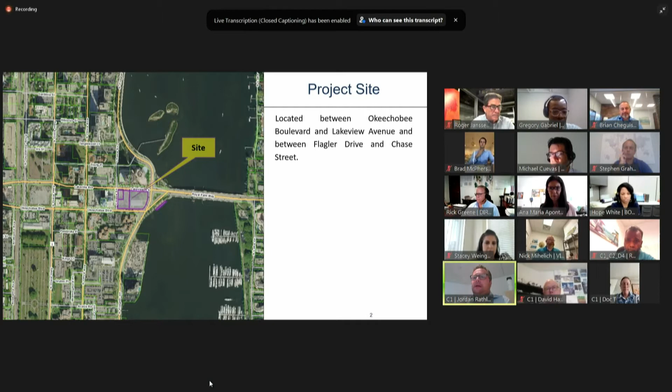Thank you, good, great. Staff and board, appreciate your time this morning. We're here, Jordan Rathlev on behalf of the applicant, Related Urban Development, to present DAC special plan review case number 1908A. I think many of you on the board are familiar from the initial approval of this project. For those who are not, the site is between Lakeview and Okeechobee, bordered by Chase and Flagler, right at the Middle Bridge in downtown West Palm Beach. In regards to the request today, we have a handful of requests that we view as minor modifications to the initial site plan that was approved just over 2 years ago.

I'm going to run through quickly what those requests are and then highlight them on the plans on the following couple of pages. So what we have requested today before the board is to remove the vehicular plaza and the primary valet operations located just east of the tower and relocate them slightly to the west under a covered area. We've shifted the main building entrance and lobby from the east side of the tower to the north side facing Lakeview. We've also shifted the curb cuts that were initially approved on Lakeview by FDOT and staff to the west. We've also revised the flow of traffic at the request of FDOT and staff for that primary drop-off at the building. FDOT has pre-approved that shift already. We've also shifted the retail location to a more prominent frontage on Lakeview to create a more active use along the Lakeview frontage. And we've also redesigned the large public space that sits to the east of the building and north of the existing church, which will remain in place, that will be designated as part of the final process here.

If you can recall, in December 2019 we had a full approval by this board. The conditions of approval that were in place will remain, with some revisions recommended by staff, and we are in agreement with staff on all the conditions of approval attached to this application.

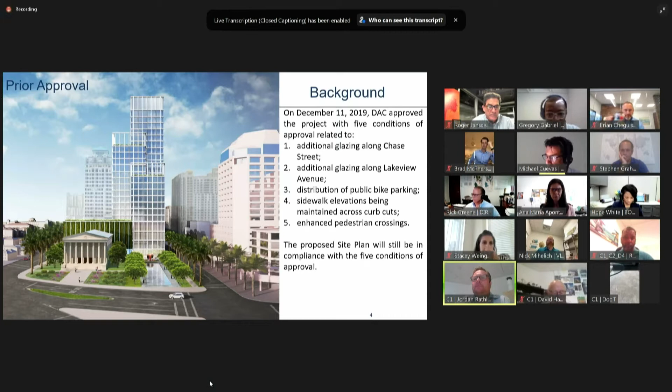On the left-hand side of the slide here is the original approved plan. As you can see, there was a drop-off area to the east of the building. The main building entrance was on the far northeast corner. This was a large drop-off area primarily for valet and Uber or Lyft, and there was a large reflecting pool and public space to the east.

What we have done over the last year and a half is look at enhancing that drop-off to the west in order to make it fully covered underneath the building footprint. This would only now be for Uber or Lyft drop-off. Valet is actually handled on the second floor of the garage.

To the east of the main building entrance, the redesign of the public open space has created a much more dynamic and flexible space. The water feature is reduced some, but it actually creates more green space and open space that can be utilized by building tenants, church members, as well as the city as a whole. We think this is much more flexible and open space, and staff agrees that it offers a much more enhanced amenity for the downtown as a whole.

So again, the primary changes are shifting that primary drop-off area west to the building footprint, and enhancing and enlarging the public open space. The total square footage of the building, the height, everything from the second floor up remains relatively unchanged. We'll show some elevations where there are slight modifications, but the majority of change is taking place solely at the ground level, given the revisions to the drop-off area.

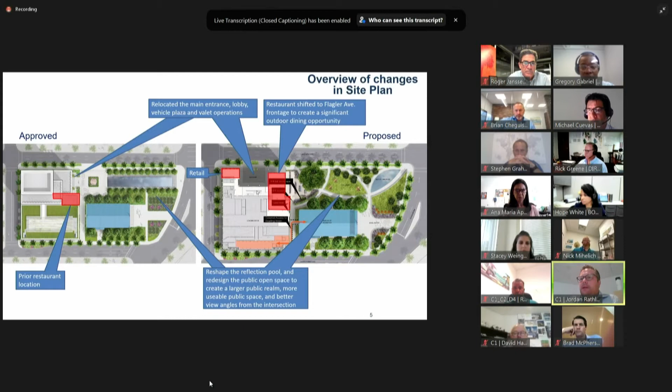In terms of traffic flow, the original plan had this drop-off to the east of the building. Valet, if you were dropping your car off, would run in a small alley between the church and the building directly into the parking garage. If you were a visitor or tenant parking, you would go down Chase into the parking garage. In the revised plan, the entrance into the parking garage has shifted slightly but relatively remains unchanged.

The primary difference is that drop-off is now shifted a little further west on Lakeview and directly under the building. In the prior plan, when entering the drop-off area, you would come past on Lakeview to the west, enter, and then exit on the eastern portion of the drop-off. In conversations with staff and FDOT, that is now shifted, so you'll actually come in to the first curb cut and then exit on the further western portion.

We think this enhances the traffic flow, but the original plan was based on FDOT comments. They've changed their mind, and staff and ourselves are in agreement on that change of traffic flow. You'll also notice this area, where the valet was primarily running cars before, is now purely pedestrian, so we think that's an enhanced improvement to the site plan as well.

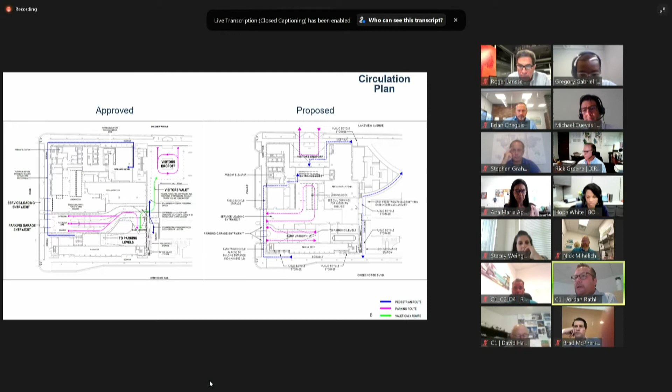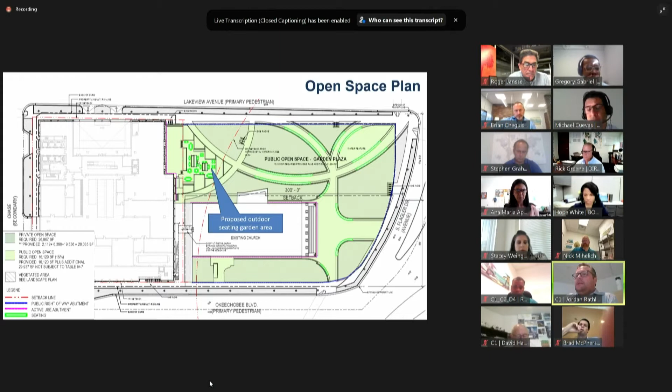In terms of what that does for the view corridors, from the building looking east you have a great public open space. One thing to note: the existing tree that remains on site today will stay as part of the revised plan. The original plan had that tree being removed, but we've redesigned to incorporate it into the landscape plan. So not only is it a much more lush environment, you're able to retain the existing large tree in the middle of the property.

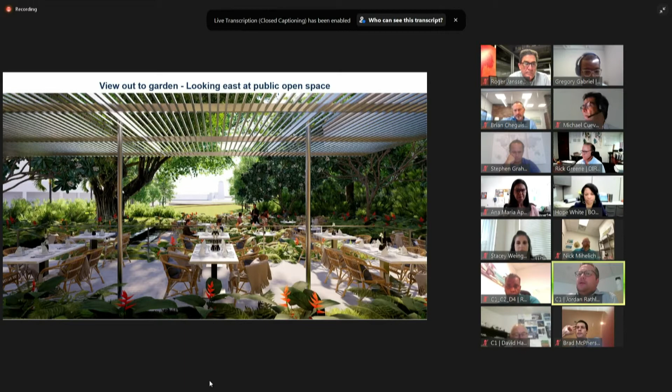Just another revised view of that active frontage on the eastern portion of the building. Again, this was initially the building entrance, but this provides a much more active use fronting that public open space.

A view of just the revised landscape area in front of the church continues to have its prominence, which is very important to staff and the historic preservation component of this project. This continues to showcase the church at the front of the property in a very lush landscaped environment.

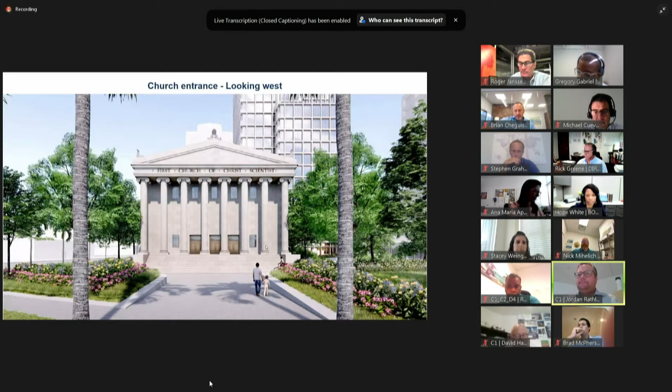In terms of the elevation, this is the north elevation where that drop-off area has shifted, becoming a very dramatic double height, fully covered drop-off experience for Uber and Lyft.

We've also added a retail component to the northeast corner of the building. Before this was just an elevator lobby, and the elevation of the glass came to grade with a living wall component, but this actually activates it much more with the retail presence on that northeast corner.

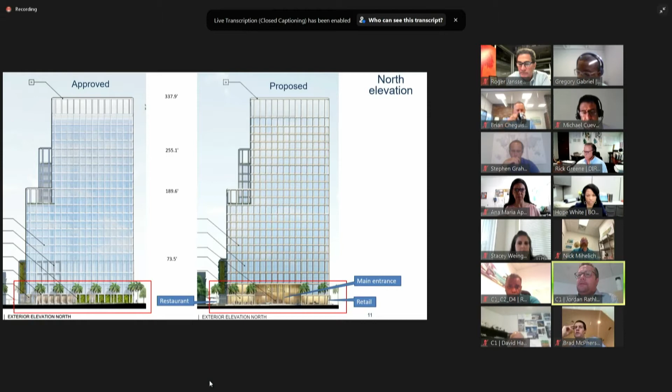As you can see, everything up in the tower remains unchanged. On the south elevation, really remains unchanged. We've played with some of the coloring of the glass, but really the living wall and everything above that shields the garage, and then the balance of the tower remains unchanged on the south elevation.

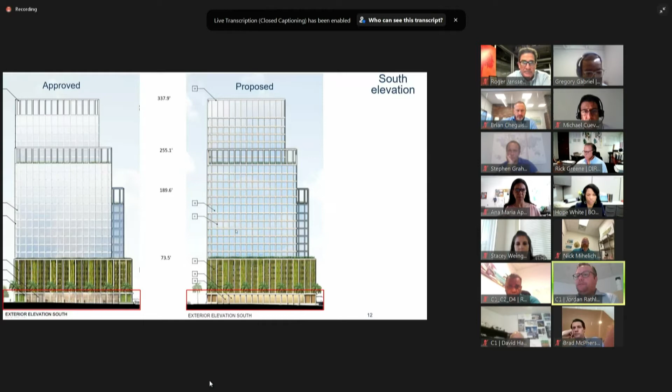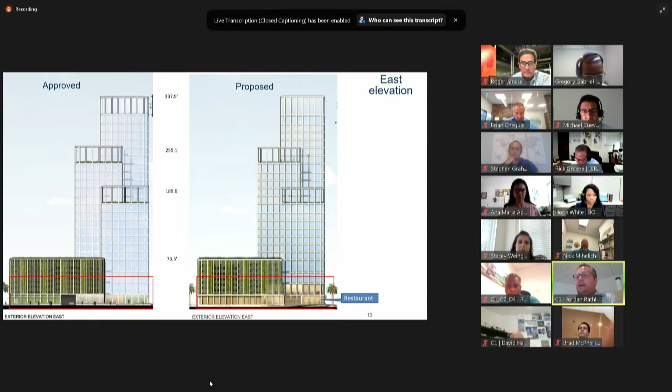On the east elevation, again, you see the restaurant has actually added some square footage on the second floor as well. So we've added some more active use on that eastern second floor, where before it was all garage, but everything again above that elevation to the top of the building remains unchanged, as well as the total height.

And then from the west facade, very similar in terms of the loading dock entrance shifting slightly to the south, but the balance of the facade remains unchanged from the original approval in December of 2019.

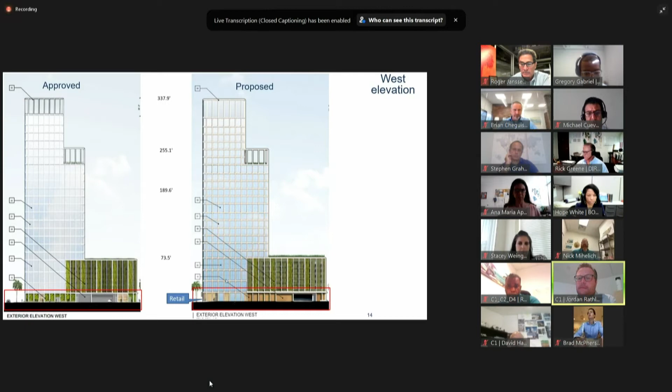So I will stop there for any questions, but I think highlighting the primary differences from the approval in December of '19, it remains the slight shift of the entrance to the west to be a fully covered experience, and the larger enhanced public open space to the east that is a great public amenity now, given it's a much more flexible and functional space. It had previously been designed with a very beautiful reflecting pool, but functionally was not a great use of the space in terms of activity and ability to program it into the future.

Okay, thank you, Jordan. So nice, concise comparison of previous and proposed. Thank you. Would staff like to comment now?

Yeah, Mr. Chair, staff has a presentation. If you're open to that, Jordan, thank you. Oh, no. Let me share my screen and do a brief presentation.

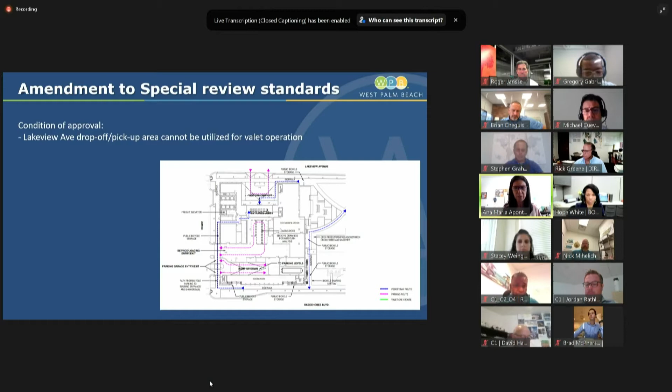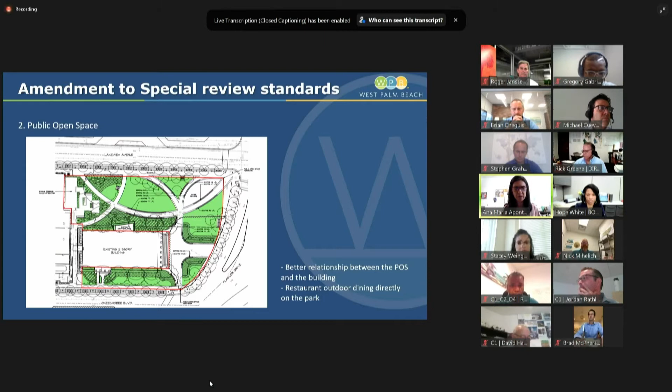Regarding the public open space, staff believes the new design creates a better relationship between the public open space and the building. It's enhanced quality instead of having the drop-off area separating the building from the public open space. Now we have a direct relationship between the restaurant and its outdoor seating with the park, which is an asset for the project and the community, activating the public open space directly.

Regarding the open space, we have some conditions of approval recommended. First is regarding the tree canopy. Staff is recommending the tree canopy calculation required for the public open space be revised to fully comply with current requirements. The existing tree canopy may be counted as long as it's within the design of the public open space, and we believe this can be handled as a staff level review after board approval.

Staff is also recommending additional shade trees along the interior pedestrian path to create a comfortable environment for pedestrians. This refers to the path that goes to the center of the open space. There are some shade trees along the church, but other areas are totally exposed. We think it's important to provide shade along that path so pedestrians can comfortably stroll through the park without affecting the open area in the center, maintaining the integrity of the open space while providing additional comfort.

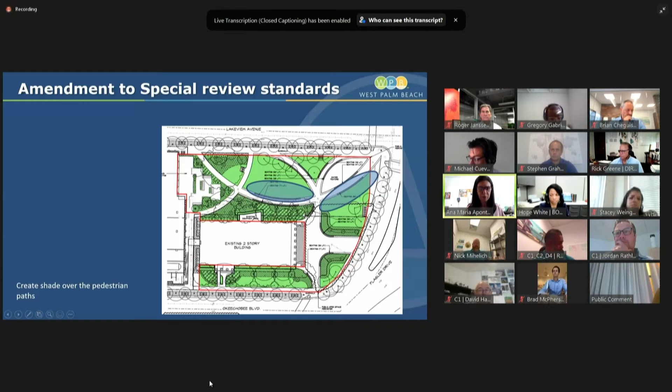Staff is also recommending that for seating, at least 15% incorporate a backrest. At this point they're proposed as seating walls along the park, which we think are appropriate, but we recommend that at least 15% of the seating has some type of backrest to accommodate older residents.

We are also recommending that the restaurant patio area provide direct access to the public open space. This is a request to really engage the restaurant into the public open space. We see restaurant patrons finishing their dinner and walking directly into the space to enjoy it. This is an additional request not incorporated in the previous approval because the design was different.

The new design has the main entrance directly on Lakeview, creating a prominent entrance in the building directly on the street, on Lakeview Avenue. The restaurant now fully addresses Lakeview Avenue and is fully incorporated into the public open space, which is a major asset to the public open space, as I mentioned.

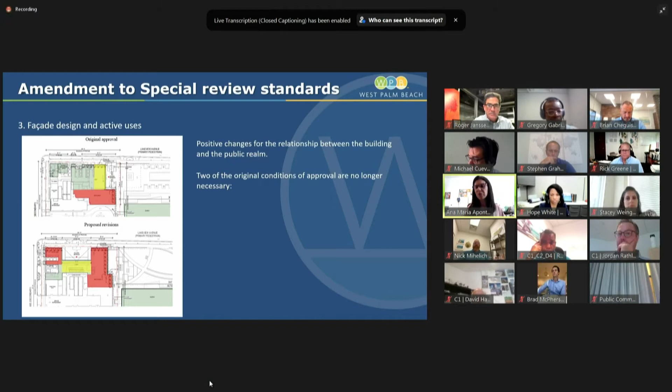With these proposed changes, two of the original conditions of approval are no longer necessary. The original approval included two conditions requiring additional glazing at the corner of Chase Street and Lakeview Avenue, and also at the manager office that was previously located along Lakeview Avenue.

With the new design, the whole area where additional glazing was originally requested is now fully glazed and is going to have the retail space. So these two conditions are no longer necessary, and staff is recommending their removal.

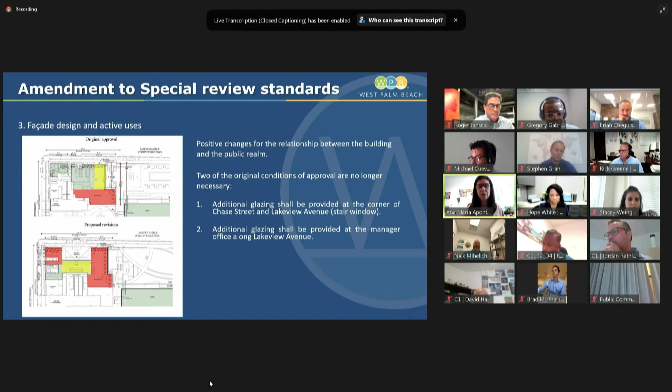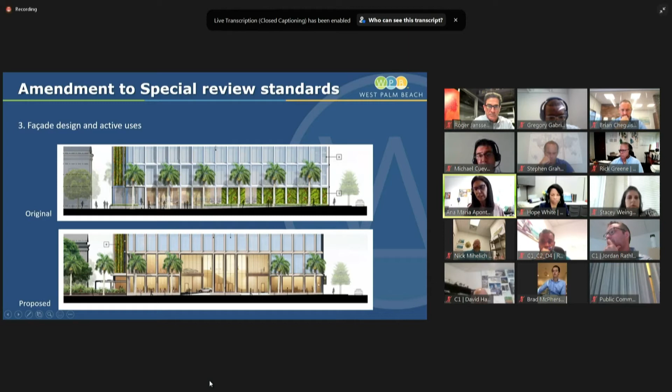This is a picture of the facade. You can see on top, the original had the living walls, for which we had some conditions of approval requiring additional glazing. Now the new proposal is fully glass and storefront, so those conditions are no longer necessary.

In summary, staff believes the project complies with the special review standards as in the original approval, and the changes do not affect this compliance. It's a good project that will have a high impact in the area and will benefit the relationship between the public realm and private space. Staff recommends approval of the proposed amendments based on the finding that the petition meets all the standards as indicated in Section 94-54D.

Staff recommended that the conditions for approval included in the December 11, 2019 final order be amended, removing conditions 1 and 2 and maintaining 3, 4, and 5, which are still applicable. Staff is also recommending additional conditions of approval.

Number 6, the Lakeview Avenue drop-off pickup area shall not be used for valet operations. Number 7, the tree canopy calculation required for the public open space shall be revised to fully comply with current requirements. If the applicant desires to include a larger open space to comply with the public open space requirement, the whole space shall comply with the tree canopy and vegetated area requirements.

An existing tree's canopy can be counted as part of the requirement as long as the canopy is within the designated public open space. Number 8, we are recommending additional shade trees be provided along the interior pedestrian path to create a comfortable environment for pedestrians. Number 9, at least 15% of the seating within the public open space shall incorporate a backrest. Number 10, the restaurant patio area shall provide direct pedestrian access to the public open space.

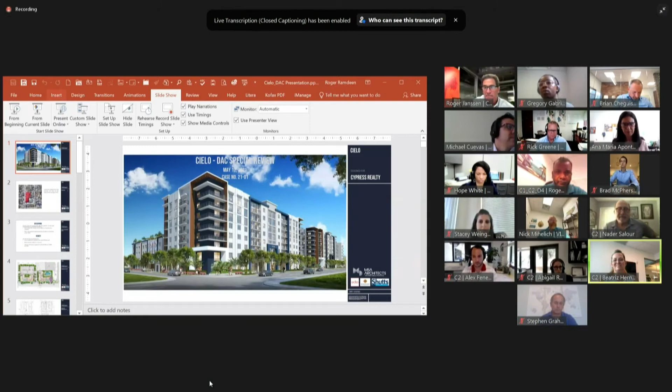Now I still can share the version that we have. Just share the version that you have, it's not that much different. Go ahead, just share it. I would suggest either doing that, and you can note any changes, or we could table this and do the next project and come back later. No, it's fine, I'll just share it. Do you see my screen? Yeah, yes, yep, please proceed. Easy, thank you, look how easy that is. Jesus Christ, okay, I won't start over, but hi again.

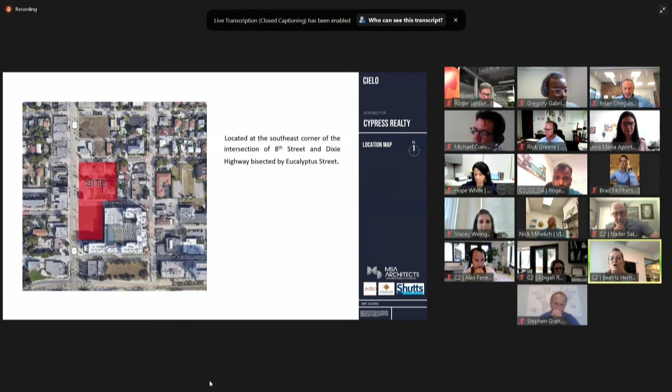So let me just recap a little bit about the history of the project. If you go to the next slide, Roger. This is the location of the site, which is essentially on Dixie between 8th and essentially 6th, and the second basically phase of the Lofton project that we came before you about 7 years ago. So next slide.

In 2014, we had gotten basically a multi-building project approved where phase 1 was completed with 259 units and about 4,000 square feet of retail. And phase 2, which is what is before you here today, with 204 units and about also 4,000 square feet of retail, which never got built. The project has subsequently been sold, still remains Lofton Place, but we're here before you today to amend the site plan to modify phase 2 to allow for additional residential units, approximately 60 units for a total of 264 units. Reduce the retail slightly from 4,000 to 3,400, and the approval of TDRs, which will be before you in June, DAC hearing, of about 28,000 square feet.

The reason for the increase in the density, obviously, as I'm sure you all know, from a development point of view, 200 units is a little small to build a project. So we needed to increase the density for the economy of scale to the 264 units that we're presenting before you here today. So the next slide, please.

This is the site plan that we are proposing. Not much different than what we had originally gotten approved from a footprint perspective. Some of the internal components has changed slightly. Originally there was a pedestrian bridge, which was previously approved in the initial phase. That has not changed. We've relocated some of the public open space components, and you can see here the project sort of in context with the Lofton Place apartments. This project stands on its own as it relates to open space calculations, parking, the setbacks, FAR, and so forth. So this project will be reviewed on its own, not with the phase 1 project.

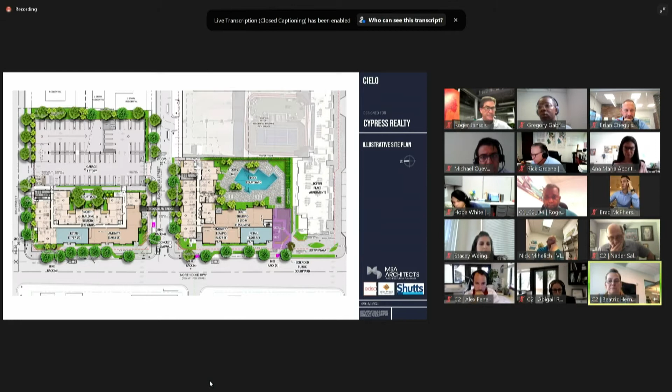So this is essentially the ground floor site plan for our project. Next slide. This just highlights what we got approved back in 2014 and where we are now. You can see it's very similar—there are slight subtle nuances based on the new style of architecture we've created, but very subtle changes in the footprint, not much of a huge alteration.

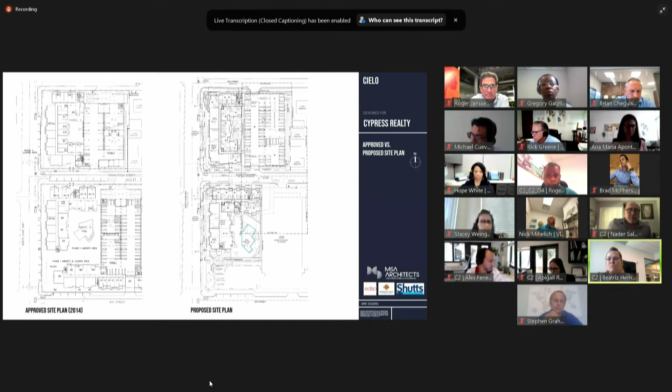Next slide. This identifies a bit, and I think it's mentioned in Ana Maria's staff report, regarding that courtyard I just discussed. There's some discussion about moving the transformer pads that we have shown sort of up against the retail and our building on the south end. We're working with staff to potentially show the alternative relocation of the transformers tucked toward the back between the courtyard, our pool, and the public space, to be able to screen that and use the retail breakout of that open space a little bit better. We're working with FP&L and staff to enhance that public open space.

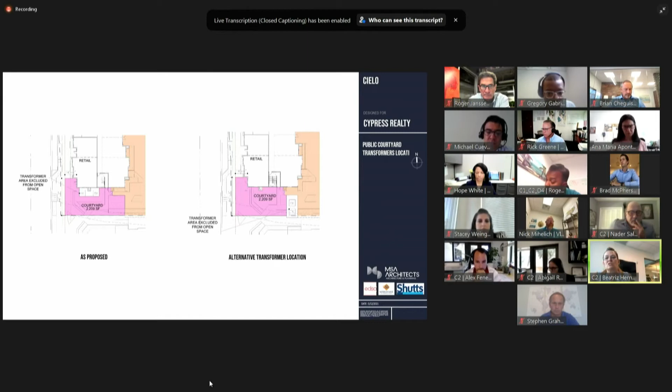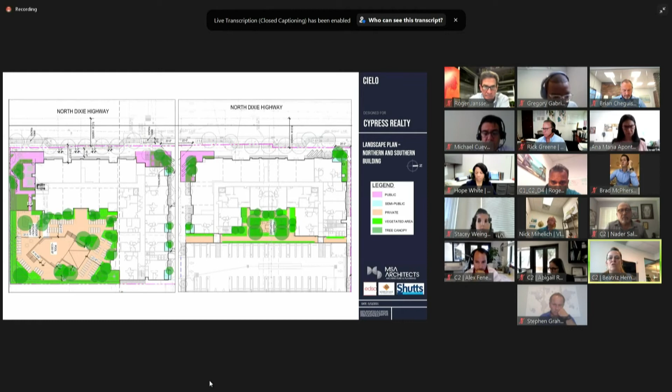So this is just a diagram showing you what a proposed location may look like. Next slide—this shows the additional public open spaces we're providing along North Dixie, and our private and semi-public spaces. The pink shows the public open space, the green spaces show the semi and private open space we're providing. And these are just exhibits showing the tree canopy and vegetated areas we have to satisfy those requirements.

Next slide. In addition to the ground floor open space we're providing, we're also providing screening of the rooftop garage, which we're doing through a combination of trellis screening as well as an amenity area similar to what we did at phase 1. In this case, we have a recreational deck and some outdoor fitness, whether it's pickleball or tennis—I think it's pickleball.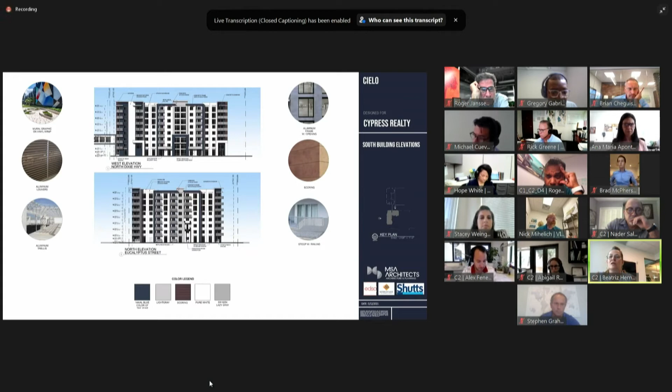Again, continuing on the elevation and the vernacular we're doing—it's a series of contemporary frames that break up the scale of the building. The roof line varies in height; we're going to do a bit more of that based on staff's recommendations to vary the roof line further. There's a series of floor-to-ceiling glass at the tops of our buildings, or at feature locations for entries and lobbies, and then the ground floor frames that create the stoop concept, for a more pedestrian scale.

And again, the south elevation and the east elevation of the south building, very similar to the north, just slightly different. We're bringing in some different color patterns, kind of a navy blue with a light gray, and then a wood look with scoring to bring a little bit more texture onto the building.

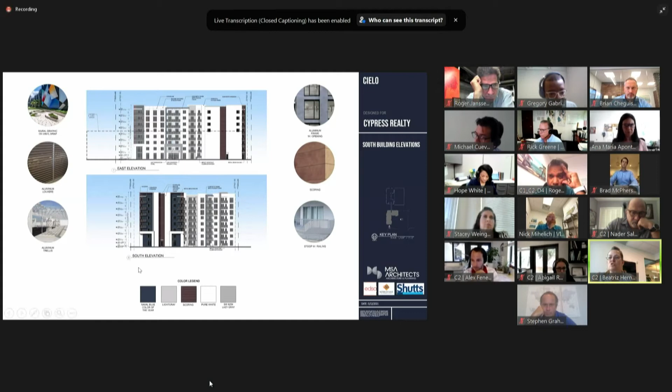These are our street elevations, which show the building in context with scale and massing for the project. Similar here, showing it from the south building, showing the parking garage and our 8-story building, and how it transitions down to the 2-story residential.

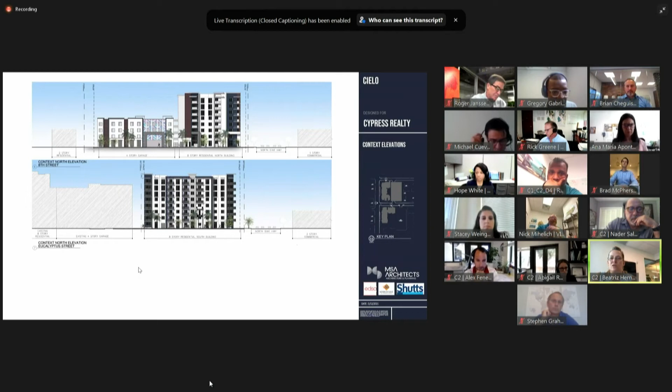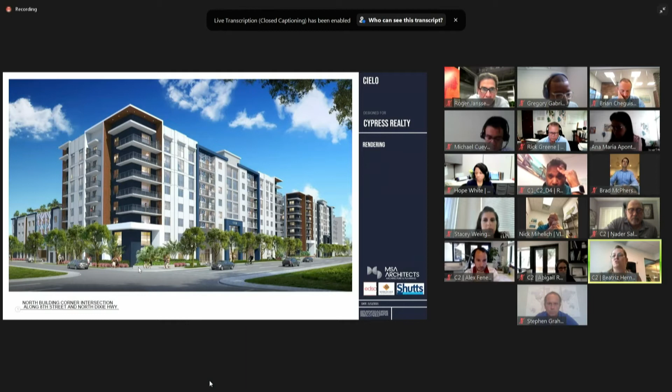And these are our renderings that really depict what you just saw in the 2D elevations. We think this is a very dramatic, elegant, modern, contemporary building. You can see how the vinyl wraps are going to be sort of a pop or an accent on the building. The design is still in flux in terms of the final look, but we like the pattern and direction it's taking.

You can see the parking garage in the background on the left side of your rendering, and sort of the street level uses that are happening along Dixie.

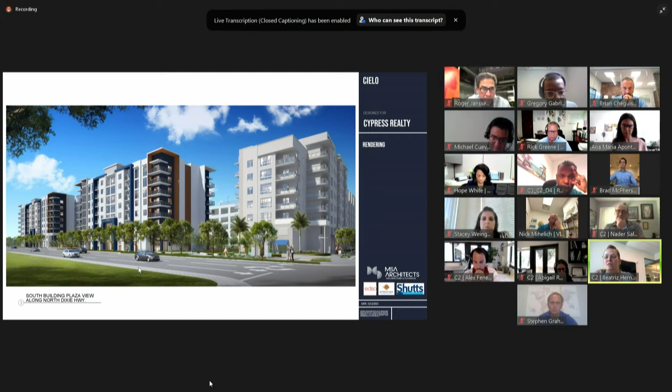These are just more enlargements of the street level perspectives of the stoops and the retail and amenity spaces. You can see these concrete seat walls that we're placing on the corners. Our idea is that each of these seat walls would have their own sort of design and identity. They could either be the wood cladding or the wood look, and in some other areas we're going to bring some of the color down into the space of the seat walls.

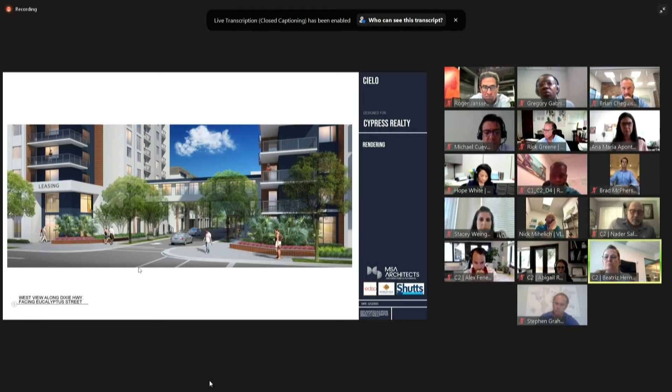And this is the larger public courtyard that we've created. Again, we brought some color down into the plaza, trees with canopies and some color and texture, but a place where people really can wander and gather through, and then the retail breaks out into the space. We don't know exactly what that retail space is going to be, but it could be a cafe, something that engages with this public space we've created here.

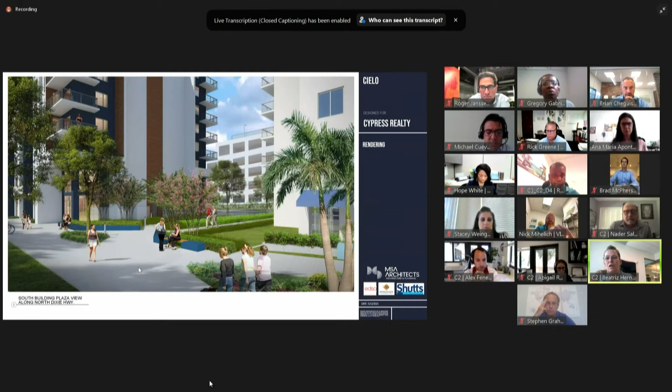And then finally, this is a view down the middle of our project, showing the step down from the residential building to our garage down to the adjacent two-story building. You can see the architecture of the garage, which is always a big topic of conversation. We've really taken great effort to bring it to be very similar in style, proportions, and massing to the residential building, to make it feel more like a residential building than a garage. We feel it scales down very nicely with the adjacent residential building, and you can see there's enough space between that building and our garage to landscape with canopy trees, shrubs, and ground floor cover.

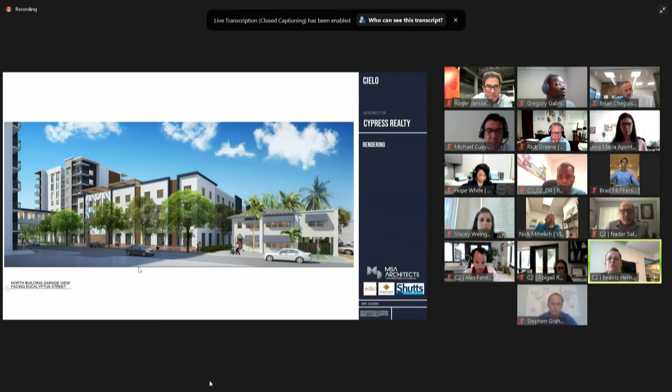So we just want to touch on some of the elements under which we are here under review by you, the board. We feel that with all of these components, we've complied with the relationships of the buildings to the site, the circulation and traffic flow, our building design, and the public realm, which is the multiple public open spaces that we've provided.

If you go on to the next slide, that really concludes my presentation, and hopefully we will be seeking approval by yourselves. We are also in agreement with staff's recommendation for approval. And I thank you for your time.

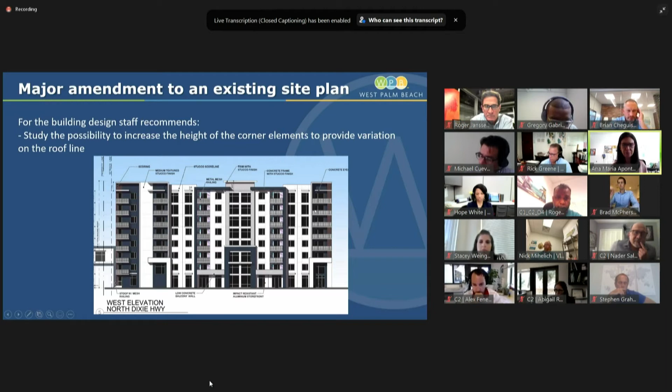We are also recommending some additional studies of the bridge. Right now it has a series of just windows with color trim on the top. We are suggesting the applicant may look at other options to see if maybe the dark brown element could be incorporated, or some variation on the windows, something that provides additional enhancement to the design of the bridge.

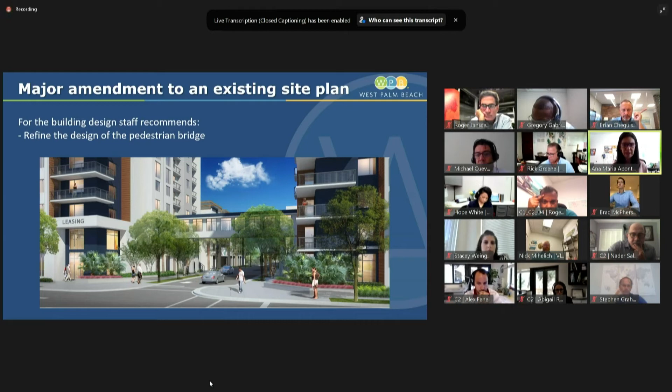Again, these are recommendations for the architect to study and determine what can be done to enhance the quality of the design. We're not specifically proposing a particular thing. It's more like for them to have the ability to study and refine the design as it moves forward.

The same recommendation goes for the ground floor along Dixie Highway, to enhance the pedestrian quality of the building and ensure the success of the retail and commercial spaces at the ground floor. This building has large windows, but you want to be sure that the quality of the pedestrian realm and the facade on the ground floor along Dixie reflects the commercial space that it will have.

We would like the applicant to sit down and study in more detail the location of the retail spaces versus the amenity areas they will be able to locate there, to really highlight what are the commercial spaces on the corridor, to be sure that they are successful.

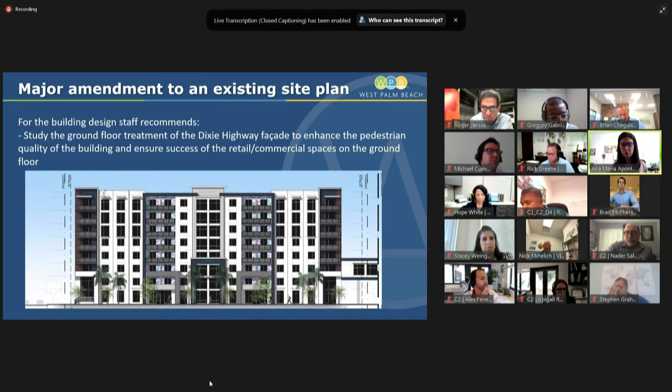This recommendation is born based on some situation we have with an existing building in the core of the downtown, the Soleil building. It has some commercial spaces on Quadrille Boulevard, but it does not really clearly read as commercial spaces. So we think it's an opportunity to enhance the quality of that design to really highlight the commercial nature of that area of the building, and provide all the design elements to ensure that commercial activity is attracted to leasing those spaces.

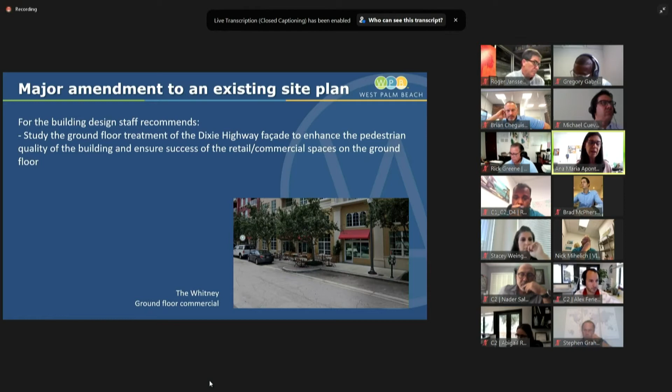This is the existing design for that building, and you can compare it with another ground floor in the downtown that has commercial spaces. That ground floor has been a more successful commercial space. That's why we would like the applicant to delve further and refine the quality of the design at ground level, to ensure that the commercial uses proposed are attracted to occupying those spaces.

Regarding the public realm, the project is, as I mentioned before, a substantial improvement to the area. The walk-up units will enhance the quality of the pedestrian realm. The applicant is proposing planting areas along the right-of-way with shade trees around the entire project, enhanced bike racks, seating, benches, and shade trees.

That's a big enhancement for the area that will complement the work done with the already built phase 1. Regarding the public open space, the project is in compliance with the minimum dimensions required for the public open space, the semi-public, and the private open space. The numbers are included in the submittal. In terms of dimension and location, staff agrees with all the locations and dimensions of those open spaces. However, the large open space is considered very important due to its location.

That open space is adjacent to the existing public open space for phase 1. Staff would like the opportunity to have more time with the applicant to work on the details of the design for that open space, due to some issues Beatriz already mentioned regarding the location of an existing fence.

You can see in the picture for the Lofting phase 1 public open space. We'd like to have the opportunity to work with the existing owner of the building to remove that fence and integrate the existing public open space with the proposed public open space, making it a larger area that will definitely be an asset for the project and the community.

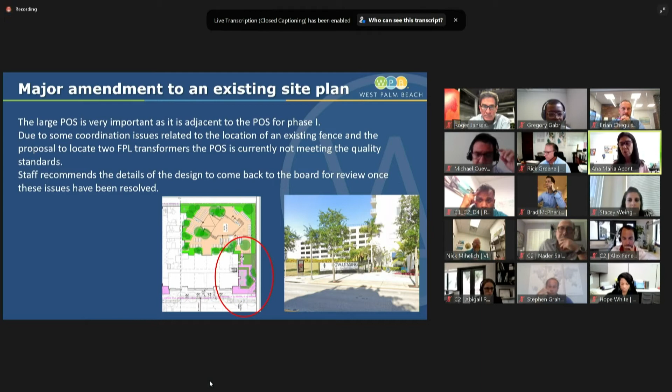So we will need some time to work with the applicant on relocating those transformers and get FPL approval and consent for that relocation. So that's the reason why staff recommends that the details of the design of the public open space come back to the board for review once all these issues are resolved.

In general, as I said at the beginning, the project complies with the special review standards. We think the project is going to be a good addition to the neighborhood. When Lofting phase 1 was built, it was well received by the community. I think they will be happy to see phase 2 moving ahead, enhancing the quality of the area around North Dixie Highway, which needs some additional investment. Based on that, staff recommends approval for the special review, based on the findings that the petition meets the standards as indicated in section 9454B2.

The staff recommends the following conditions of approval. One, additional landscape shall be proposed to screen the garage facade. Additional landscape may include sago palms and other palms between the trees, and a vine such as a creeping fig, to grow on the garage facade wall.

The sidewalk elevation shall be maintained across the driveways. Number 3, the building design shall be modified as follows: study the possibility of increasing the height of the corner elements to provide some variation on the roof line; refine the design of the pedestrian bridge to make it a neighborhood entry feature; study the ground floor treatment of the Dixie Highway facade to enhance the pedestrian quality of the building and ensure success of the retail commercial space on the ground floor; additional landscape shall be installed adjacent to the mechanical room located along Dixie Highway on the south building; and replace the ground floor louvers in the garage with decorative grills.

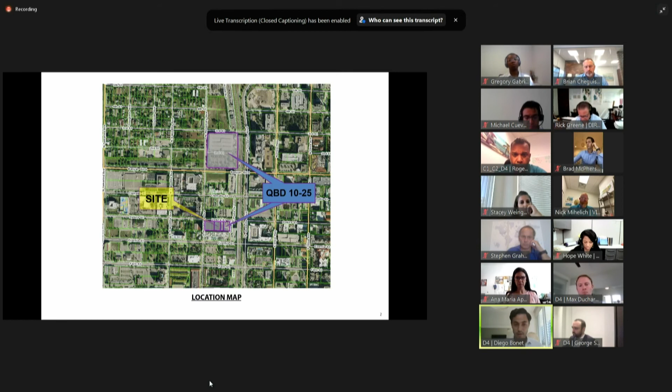In terms of what we're requesting, two amendments to the zoning code. Number one, to reduce the minimum room size for boutique hotels. Number two, to allow boutique hotels to be eligible for the TDR incentives, which only apply to full service hotels and Class A office right now.

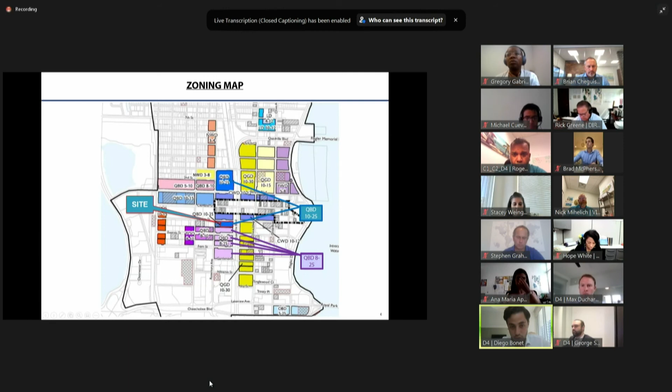One note, staff did ask that the proposed amendment also apply to QBD 8-25, which we'll see in the map here. QBD 10-25, where our lot sits, is one of only two parcels or blocks in downtown with that zoning code—where we are, and this lot here, the courthouse parking lot, which is unlikely to be redeveloped. Then QBD 8-25 covers three series of lots to the south, blocks to the south.

Going into our first request to reduce the minimum room size for boutique hotels, the main rationale is, to be honest, we think 325 square feet is a bit of an outdated standard. We're requesting to reduce it to 275, which is still generous. This is especially true because the main amenity boutique hotels have is the city—you're expected to spend less time in your room and more time at local bars and restaurants, getting to see the city. So a lot of brand standards won't even consider our project for their brands at room sizes over 300 square feet, because they just don't have the programming for those rooms.

We're going to share a little about the trends we're seeing. This is an article by the New York Times that talks about micro hotels. We're not trying to put a micro hotel there—we're trying to be a little more conservative and stay at 275 square feet. But you can see in some of these publications that room size is going as small as 200, 170. Moxy, which is a brand from this area, is 180 square feet—they wouldn't even consider our project at the square footage we're talking about. And this is consistent across the United States: as cities become more hotspots, room size has been trending smaller and smaller.

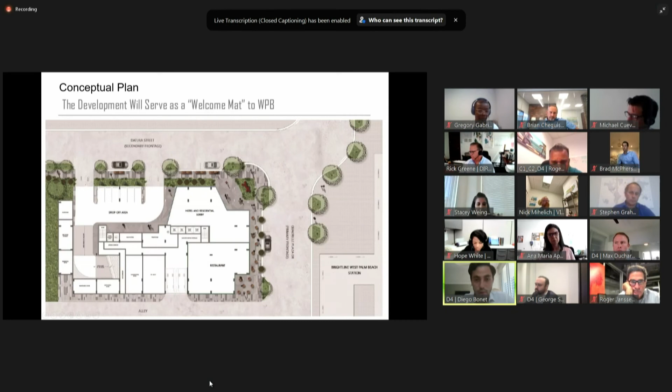If you get to the Brightline station a few minutes early to catch your train, there's really no place to have a bite or a drink before catching it. So we're looking to place a hotel restaurant facing directly toward the Brightline station, which we think will help bring a lot of life to the area. That's it in terms of our presentation. We're happy to answer any questions, and we thank you for your time.

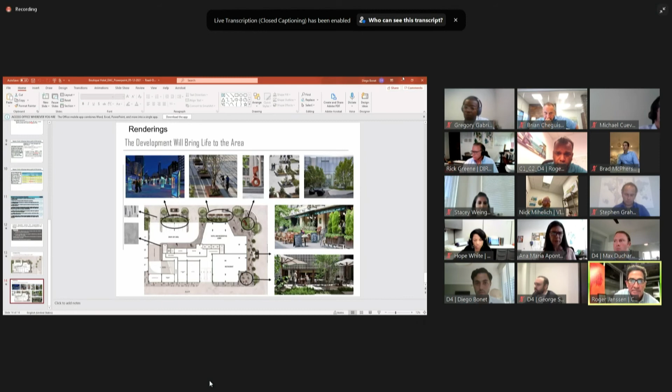Thank you, Diego. Staff, would you be following up now? Yes, I have a presentation to share also.

A little background about this area: the QBD incentive was created in 2009 during the process of updating the downtown master plan, and its intention was specifically to fill what was known at that time as the 'hole in the donut.' The incentive encompassed the properties between Rosemary and Quadrille, Gardenia, and Datura, plus an additional block on the north side of Banyan Boulevard. The big hole in the donut was identified as the area between Clematis and what would connect Clematis Street with Rosemary Square, previously City Place.

So the incentive was drafted as added development capacity to lure developments into this area, which was basically just some small warehouses and vacant sites, allowing an increase of FAR from 1.75 to 2.75 base zoning up to 6.5, and a substantial increase in height from the 8 or 10 stories base zoning to 25 stories.

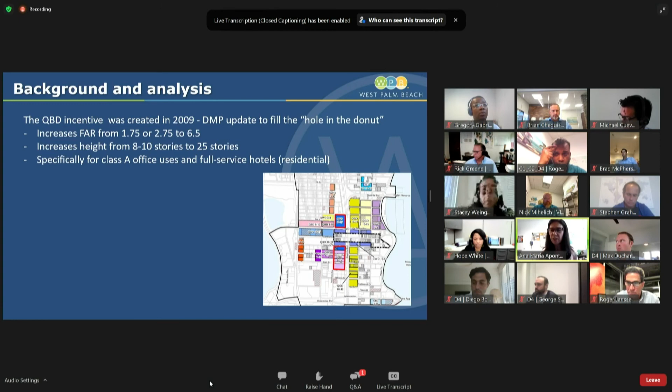The incentive was crafted specifically to provide that additional height and FAR for Class A office uses and full service hotels, identified back in 2009 as uses that were desperately needed in the downtown. We didn't have any projects going through with that type of uses, and the intention was to incentivize it. The program offered developers with those uses TDRs free from the city pool of TDRs, so they didn't have to pay in the private market for the additional development capacity.

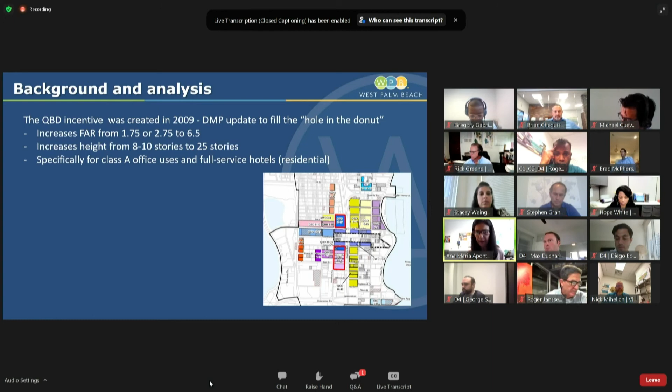Subsequently, there were some amendments, and we allowed residential uses to use the incentive with a lower FAR. They were allowed to go only up to 4.5 FAR. But the goal of the incentive was, in essence, the Class A office and the full service hotel.

Since 2009, I think I can say the vision of the original DMP update has been materialized. We have not only the Parkline, which was built, but also the 360 Rosemary office building, which is almost completed. It will open at the end of May or beginning of June, and is fully leased—creating the first Class A office in the downtown area built since 2008.

It's also next to the brand new Brightline train station, which was not included or even thought about in 2009, but fits perfectly with the vision of this core, concentrated, high-intensity development area.

With this background in mind, when the applicant submitted their request in February, staff was already working on code changes to the existing downtown incentives. The office and hotel uses were no longer uses we needed to incentivize. The city is now working on changing the incentives offered downtown to promote the construction of workforce housing.

The intention specifically for this district was to remove the calling out of particular uses that were allowed to obtain city-owned TDRs at no charge—basically to remove the requirement for Class A office and full service hotel as a condition for using the additional development capacity and height offered by the incentive.